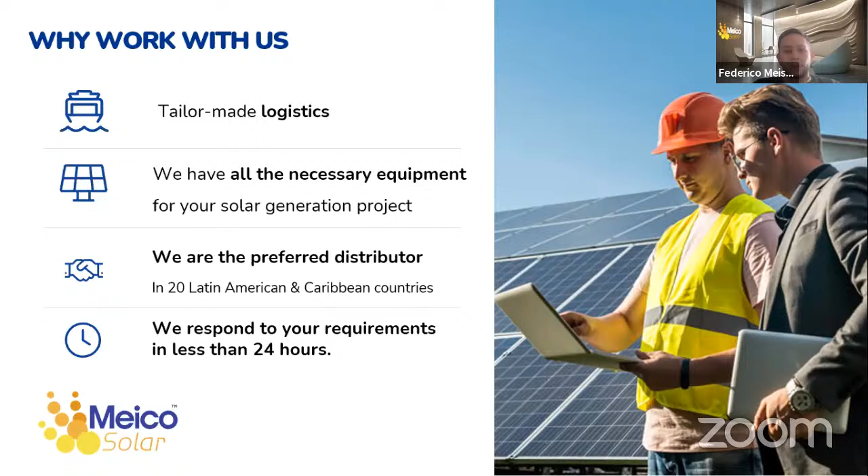Why work with us? We have tailor-made logistics. We have all the necessary equipment for your solar generation project. As I told you, we have all the categories - inverters, panels, racking, lithium batteries, and POS. We are the preferred distributor in 20 Latin American and Caribbean countries, and we respond to your requirements in less than 24 hours.

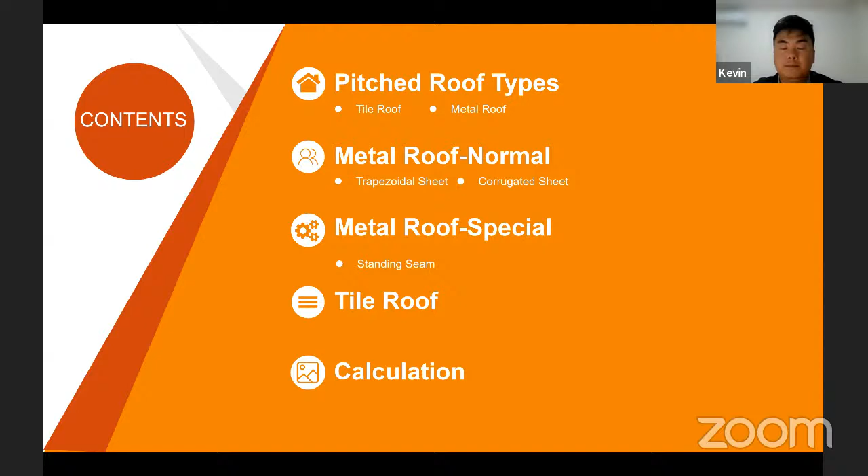When we talk about metal roof, we normally have two types. The normal one, we call corrugated and trapezoidal roof sheet. For special sheet, we call it standing seam. And the tile roof, the most used is S tile.

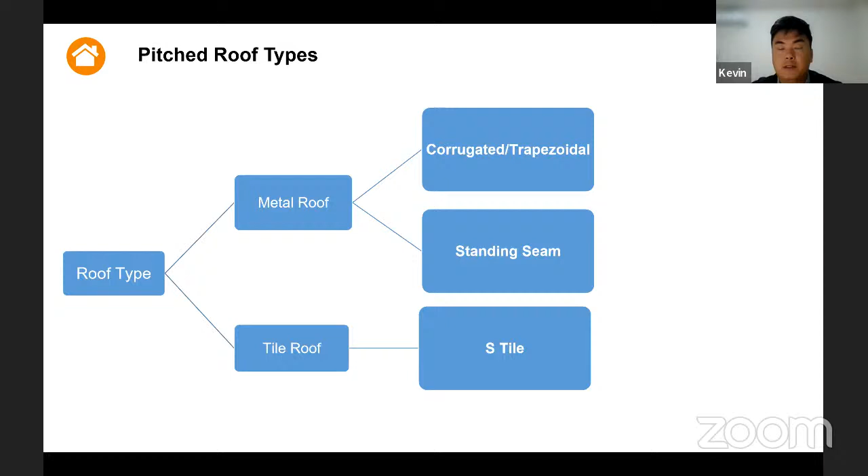Let's see the normal metal sheets. On the left, it's called trapezoidal sheet. On the right, it's corrugated sheet. They are the thinnest metal sheets on the market. About 90% of the market is these two metal sheets.

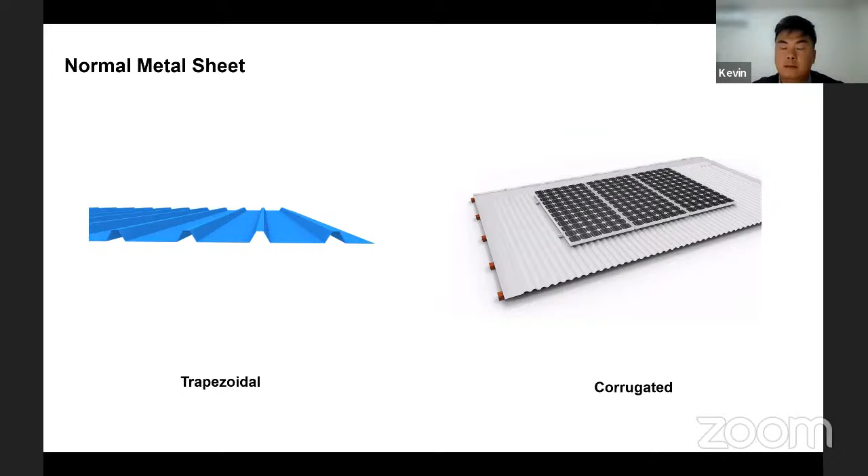If you have a project like this, what's the solution? The most used solution is L-feet. That's the most used solution for a metal roof project. You can use it on the trapezoidal sheet and on the corrugated metal sheet. We have self-tapping screws, and on the bottom of the L-feet we have a rubber pad to prevent the roof from rain.

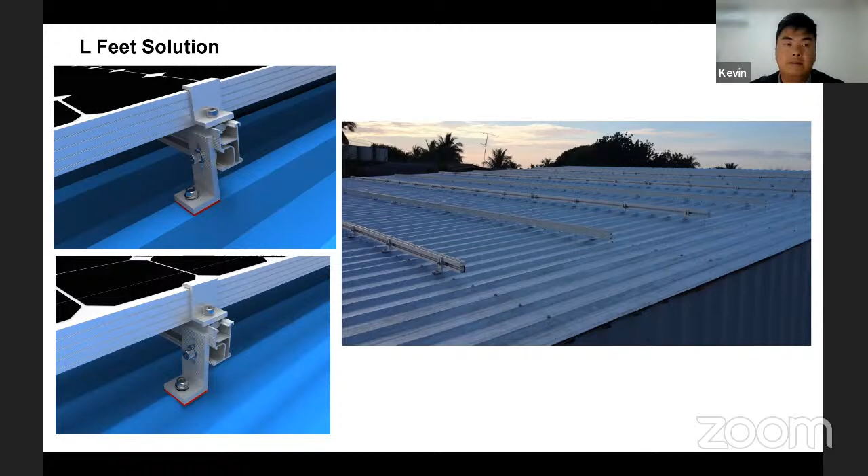What if you want to have an air space between the metal sheet and your panel? What if you want more air flow through the panel to take away the heat? Then you can have the below solution: the L-feet with the hanger bolt and the self-lock bolt solution. What's the difference between the two bolts? That depends on the support under the metal sheet. If it's a wood rafter, you use a hanger bolt. If it's a steel purlin, you need a self-lock bolt.

Also, with these two solutions, you can have a stronger support to support the panel. You can also stand a stronger wind, as the structure has a stronger connection to the roof.

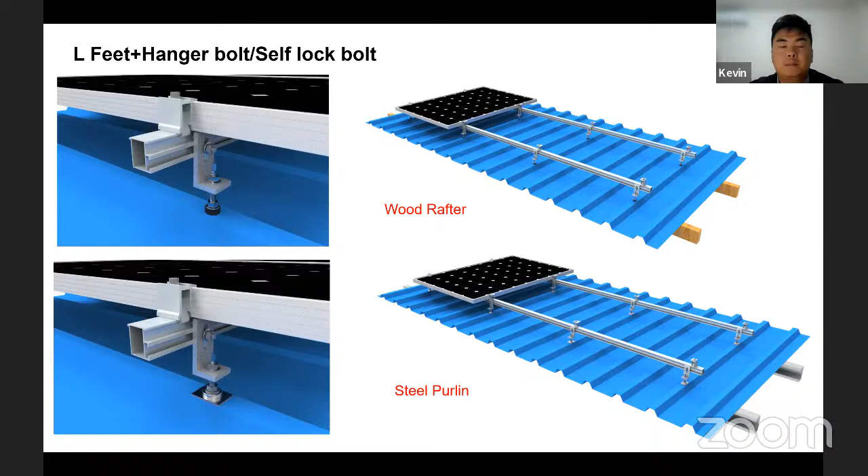Then there is also another metal sheet on the market. We call it standing seam. It's not a regular metal sheet—you see it's like a folded type.

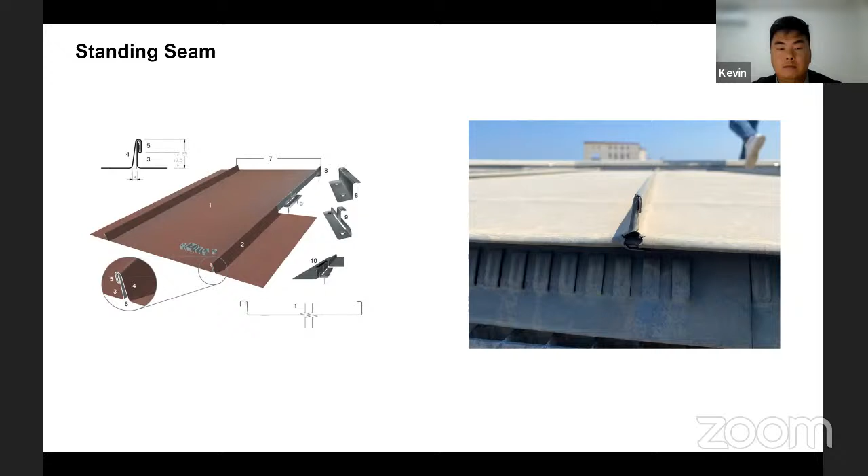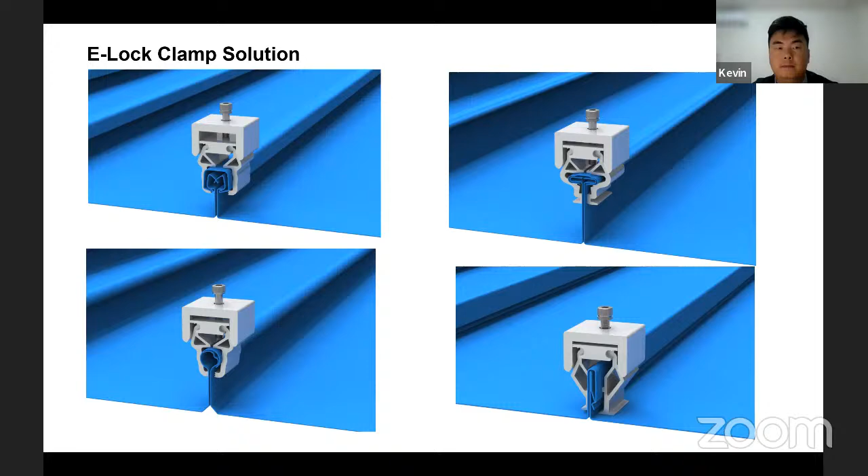How do we solve this problem? We call it the E-lock clamp. We have about 100 types of E-lock clamps, so basically we have a solution for almost 90 percent of the standing seam you can see on the market. And the clamp is also used together with the L-feet.

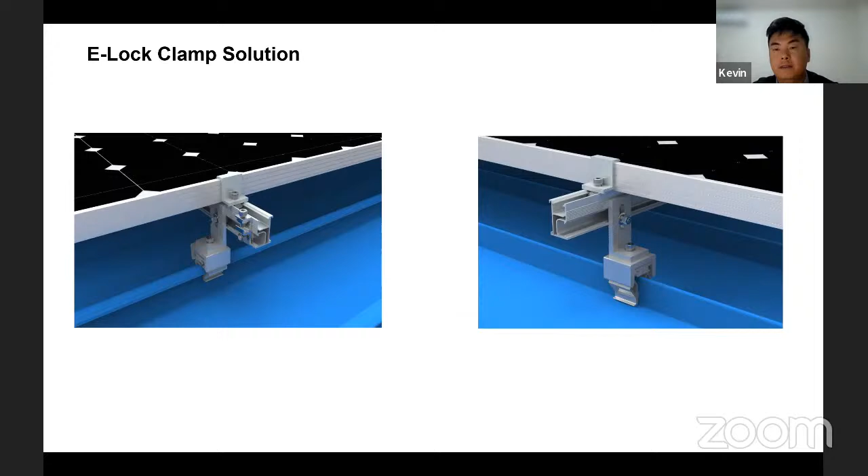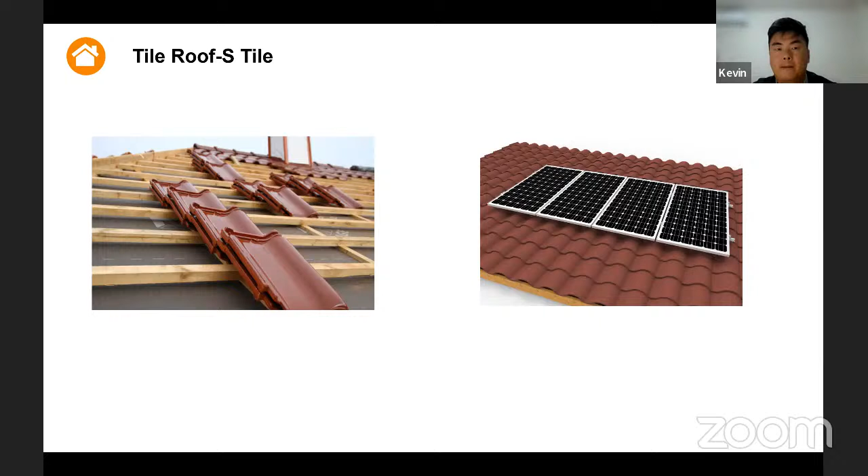Then when we talk about tile roof mounting, we usually talk about the S tile, or Roman tile—it's a ceramic tile. What's the solution for that? You can use our stainless steel hook, using three screws to fix the hook to the wood rafter. It's very sturdy.

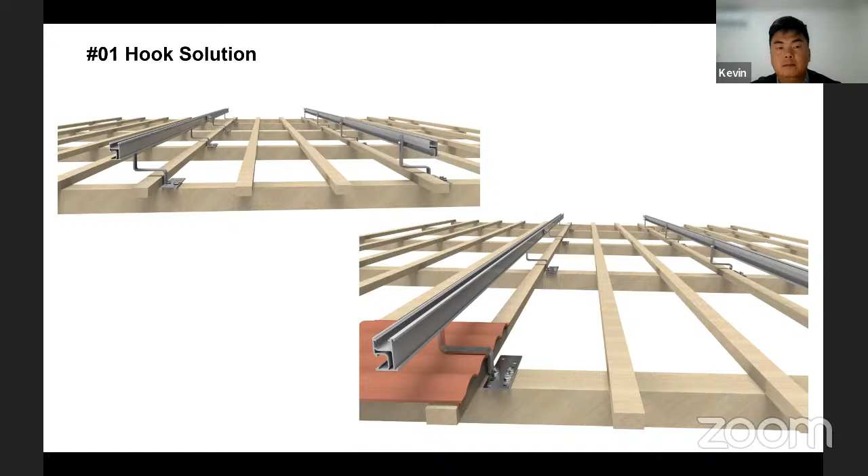Now let's have an overview of the pitched roof mounting systems. Number one is our rail, we call it 537 rail. The second is the rail splice kit, also called the rail joint or rail connector—you use it to connect two shorter rails to make a longer rail. The third is our grounding adjustable middle clamp. It has a grounding function, and it's adjustable, fitting panels with different thickness from 30 to 40 millimeters.

This is a grounding adjustable end clamp—it's also grounding and adjustable for different panels. Number five is the grounding lug, used to fix the copper grounding wire. The sixth is the E-lock clamp. And the seventh is our hook, the L-feet, the hanger bolt, and the self-lock bolt.

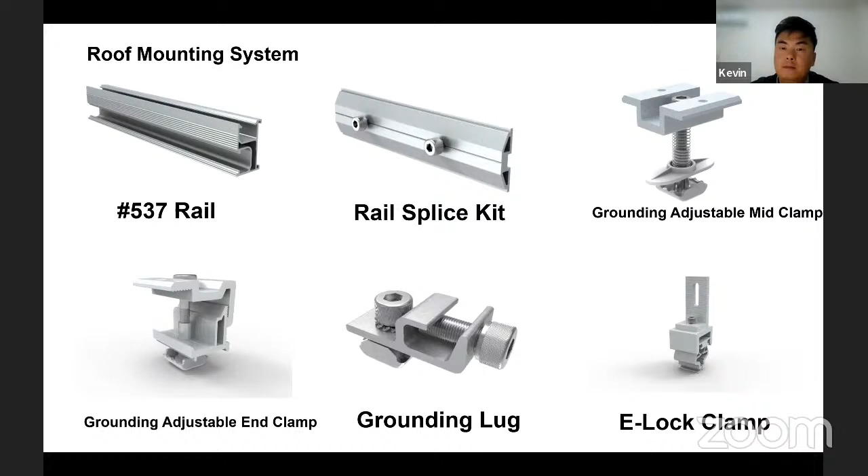For the E-lock clamp, the L-feet has a hole of 9 millimeter diameter, because we use an M8 bolt to connect the L-feet to the clamp. For the hanger bolt and the self-lock bolt, they are M10 millimeter, so the L-feet for these has a hole of 11 millimeter diameter. That's the biggest difference.

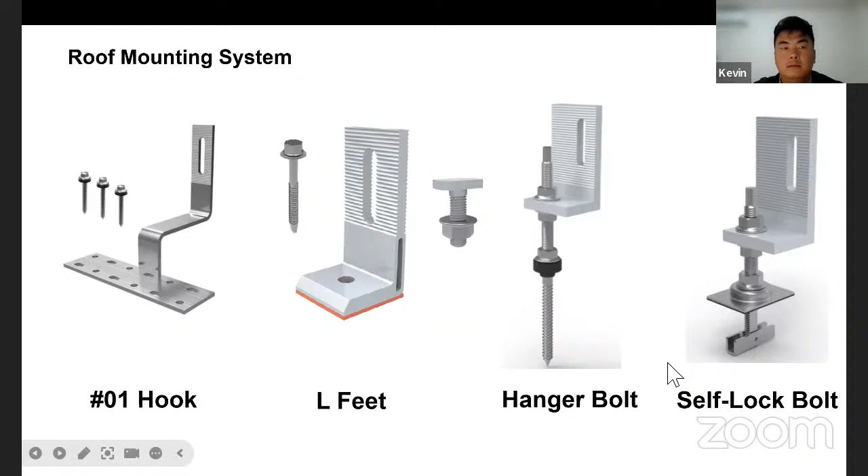In the end, I want to teach you how to calculate the number of different items you will use in a project. Let's assume the panel size is 1665 times 1002 times 35 millimeters, and the panel layout is 4 panels, and the span is 1500 millimeters.

First let's calculate the rail length. Basically the rail length is your panel width times the panel number.

You can see here we have 1002 times 4, and because our middle clamp width is 20 millimeters, we must add the distance between panels.